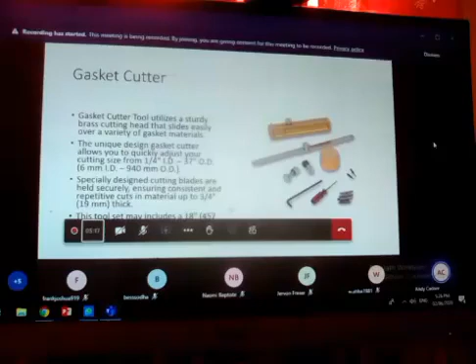Then we have the picks. These picks are used to take out the packing from the stuffing box. A little note on the pick here: they are made of special tool steel with the roughest usage. These tools are warranted not to break when removing the packing from any type of stuffing box. They tell you it's a warranty, that it shouldn't break, because they made it out of high-grade tool steel. So you wouldn't have that when you put it inside the packing. When you start to pull it out, hopefully the screw wouldn't break.

But you know, with all things, none break as yet when removing the packing.

You have your flexible packing extractor. This is our next type of extractor, but this one is slightly different. This one is stiff, non-flexible, and you have your flexible one. They say the flexible packing extractors are constructed with high-strength cable for the flexibility.

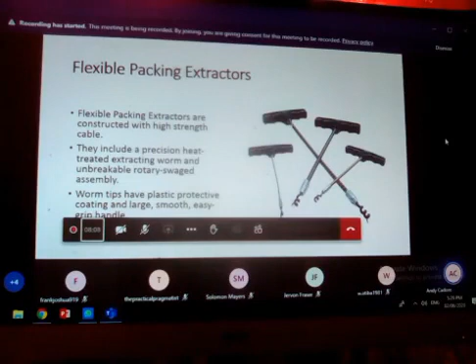Now, I'm not sure on the design of the flexible packing extractor that NESC has. This is just a certain brand which comes this way. Some of them don't have this easy to grip handle.

Hollow punch - they are used for punching holes in leather and gasket material. So hollow punch is a punch that is used for punching holes in leather and gasket material.

Now, most of the time you'll use the hollow punch if you're doing one of the full face gaskets and you have to actually punch out the bolt holes. So you could use this.

You could also use them when you're making small washers. But most of the time we make small washers in the case you're fabricating something close to a pump and you don't want, when you strike the arc, the bolts ground off onto the pump itself. So you tape up the bolts and you put these gasket material washers so that metal to metal contact between the pump and your flange face - to resist that metal to metal contact, you're going to use these gasket material washers.

We have a video presentation here on how you use the punch. It's a short video, so we can just take a look at it.

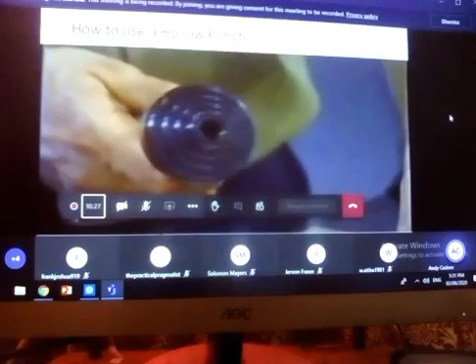All patch power punches are perfect for this job. To make this 5/8 bolt hole, you use a bayonet mount. Select the 5/8 cutter and put it on the mount. Line the tool up on your guide marks and strike it with a non-metallic mallet to cut the hole. ID and the OD at the same time - to do this, you mount both the ID cutter and the OD cutter on the bayonet at the same time. Notice how easily the cutters mount on the mandrel. Then you use the mallet to make the cut.

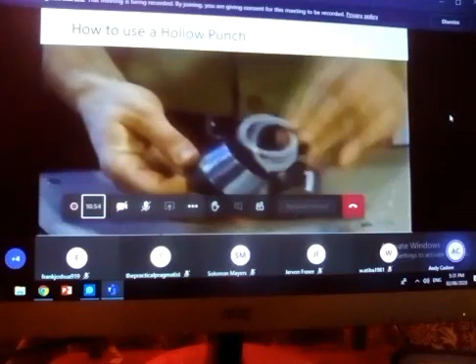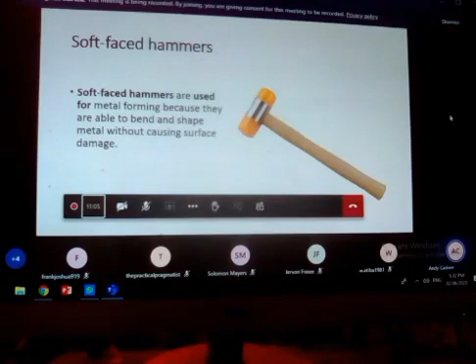Any questions? Any questions based on the hollow punch?

Now, if you look, this man in the video presentation has a nice hollow punch - it's a sort of double design. The hollow punches I know we have at NES are like these. So if you had a cutter inside and outside, you'll be using two separate punches. It isn't designed like the one on the video, where you use one punch and connect the two heads onto the mandrel.

Those that we have are like these, so you have to punch them individually. So if you want an inside diameter, you use a small one, and then you use a bigger one for the outside - that is in case you're making a washer. But normally you use the gasket cutter, and they give you the same small and large cut with the gasket cutter. Any questions so far?

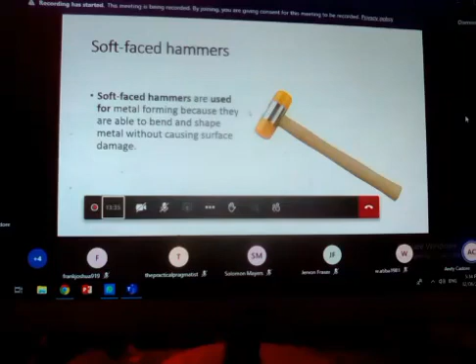Then you have your regular ball peen hammer. The ball peen hammer, also known as a machinist hammer, is a type of peen hammer used in metal work. It has two heads, one flat and the other called a peen, which is rounded.

Using the peen, and when we get into making gaskets, which will be on Thursday, you'll see how they actually use the head to mark out the gasket. You press the hammer head on the gasket face itself against the flange, and now you use the ball peen to cut the holes for the flange once you're tracing it.

So the ball has a purpose, the flathead has a purpose. The ball also has a purpose, which we know as peening, when you're using it to help shape metals.

For instance, most of the time you use the peen side of the hammer, or the ball side, like if you're making something like an orange peel. An orange peel is just a fitting you use to blank off a line. It's kind of outlawed in terms that it takes plenty gas, plenty heating and cutting.

If you're making a regular reducer, you could use it too, because sometimes you have to pound it to shape it, to get it curved. So what used to happen is you put it on a creating device, or use a pipe, and you're hitting it with the ball peen.

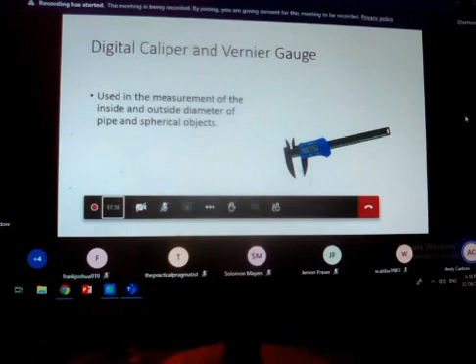Then we have the caliper, vernier caliper. So you have a digital caliper, vernier gauge, and this one is digital. It's used for measuring the inside and outside diameter of pipes and spherical objects. It's a more precise means of measuring than the measuring tape. You normally use calipers, it's a kind of machine shop tool. The machinists will use it because you want 100% accuracy if you're making a shaft.

We have a video on how you should learn to really use your caliper. Why? Because while you're testing the consistency with the valve stem, you might have some cases where you need to use a vernier caliper, not just the inside outside caliper. You might need an actual measurement, so you'll have to learn how to use the vernier caliper. This is just a small video on how to use it.

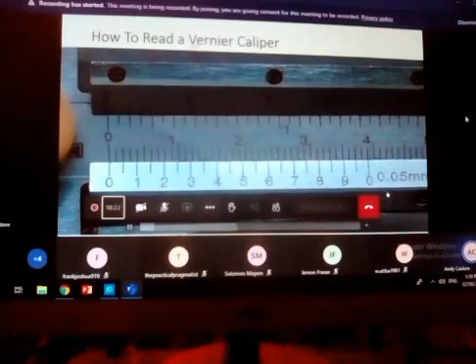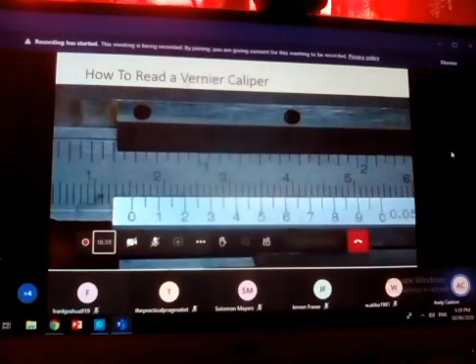This is the caliper, and the zero in the vernier scale is right on the zero in the main scale. The measurement I have is 0 millimeters. If I open the caliper, I can read 1 millimeter, 2 millimeters, 3 millimeters, 10 millimeters, 15 millimeters, 16 millimeters. But what if the zero in the vernier scale is between the 15 and the 16 millimeters in the main scale?

Well, then I must read the vernier scale. From here to here, the vernier scale represents 1 millimeter, and each line represents 0.05 millimeters. So here, the zero line in the vernier scale is after the 15 millimeters line in the main scale, so the measurement is 15 millimeters plus something more.

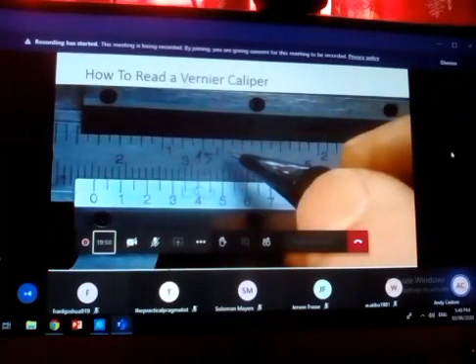Now I must look for 3 consecutive lines in the vernier scale that coincide with 3 lines in the main scale. Going from left to right, the lines in the vernier scale get closer and closer to coinciding with the lines in the main scale. These 3 lines seem to coincide quite well, and the next ones are to the left of the lines in the main scale. I am interested in the one in the middle. So the measurement is 15.40 millimeters. I have 8 lines, so 8 times 0.05 equals 0.40.

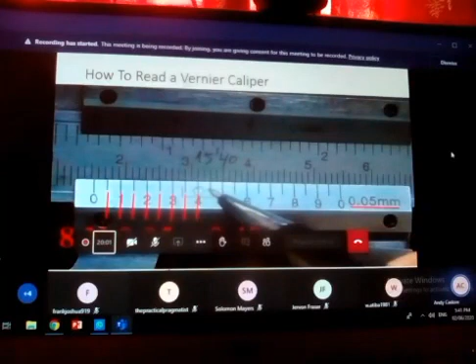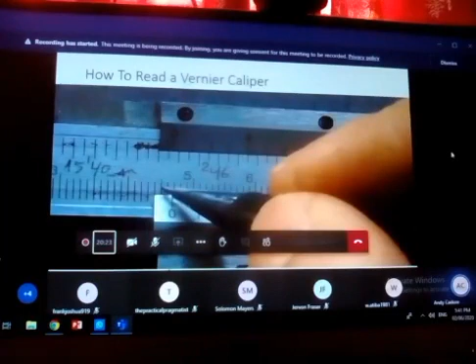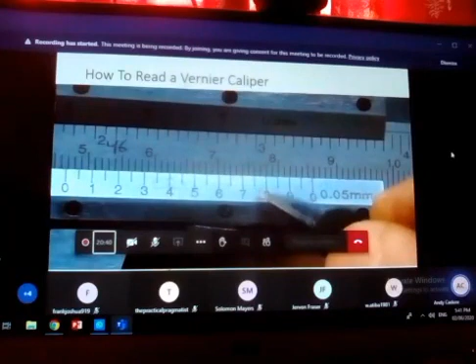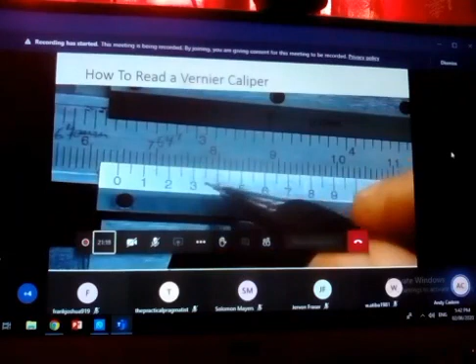Let's try it once again. Here I have 64 millimeters plus something more, and I have to look for the 3 lines. I will move the vernier scale, so this time I have something slightly different. These 3 lines coincide with 3 lines in the main scale. I am interested in the one in the middle. In this case, it is 0.35. So the measurement is 64.35 millimeters. I have 7 lines, so 7 times 0.05 equals 0.35 millimeters.

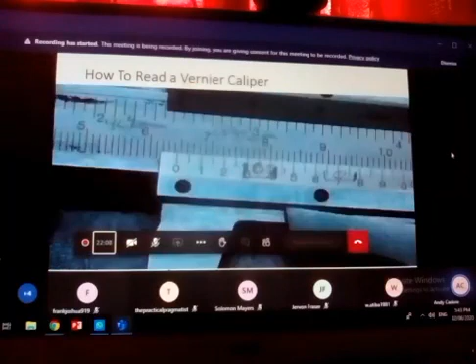Right, any questions based on the vernier caliper? This is just a demonstration on how to read a vernier caliper. As I said, it's a machinist tool, and if you're doing fabricating, you just go with the measurement close, and in that case it'd be better to say it's like 10 or 30 millimeters. You see the last one he did, he said 64 point something - so you're giving the point of whatever that millimeter is. It's a more accurate scale than the normal regular measuring tape or steel ruler.

And these are just examples because you might have to use the vernier caliper to check the measurement with, as I say, the valve stem, or if you're doing the hole diameter. You could use the vernier caliper for something more exact, something more precise than what your regular measuring tape or steel ruler will get you.

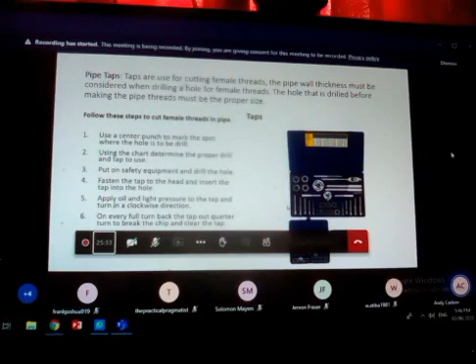Alright, pipe tap. Now even though we have a tap here, the main thing - this reading is on tapping, but the main thing is really the die. This here you're seeing, which by the cursor is - these are the dies, and these straight ones here are the tap.

The difference between the tap and the die: a die is used to cut male thread, a tap is used to cut female thread. So if you want to cut something inside, you use the tap. If you want to cut threads to the outside, which is going to be male thread, you use the die.

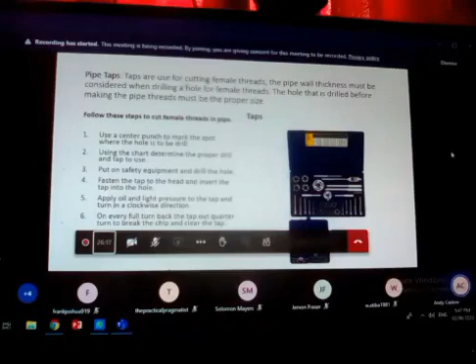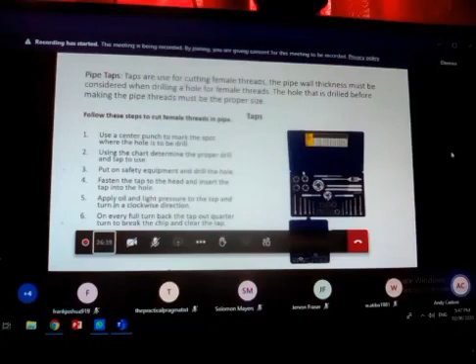And if you remember the video, when you're doing the valve servicing, sometimes the bolts that hold the gland and the gland follower, the gland flange - sometimes when you remove them, they have gumming, some of them might be rust. So what you do is put the die over it and do a process called chase - they come like you're tracing it over, but they say you chase it.

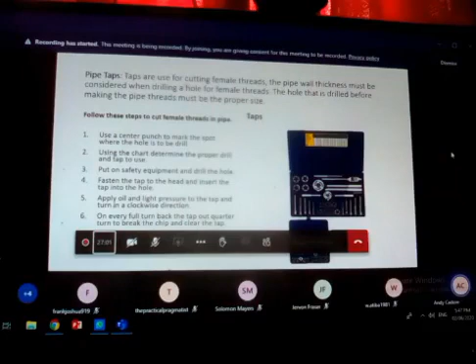This reading here is telling you about the tap. It didn't tell you as much about the die, but the die is just placed to the outside of the stud, and you run the die over the stud to make back the male threads. The tap, as I say, makes female thread - taps are used for cutting female thread.

The pipe wall thickness must be considered when drilling a hole for female thread. The hole that is drilled before making the pipe thread must be the proper size. So when you're tapping something and you drill the hole, say you drill a half-inch hole, there's a certain size tap to use to cut thread in that half-inch hole.

And if you look here within the box, this is a chart that I'll give you. The chart will tell you what tap to use depending on what size hole you drill. It's nothing that I can say I know offhand - there's a chart, so if you know you want to use half-inch, it will tell you what size hole to drill and what size tap to use for the half-inch.

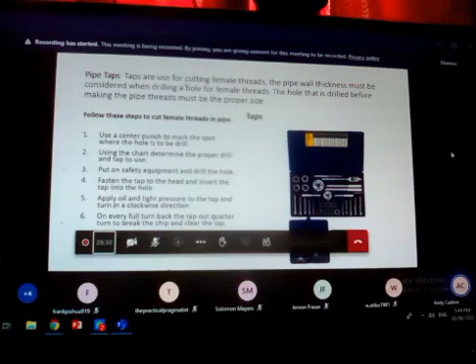So they give you some steps on how to tap a hole. First, you use a center punch and mark the spot where the hole is to be drilled - you don't want it to wander off when you're drilling, so you center punch it. Using the chart, determine the proper drill and tap to use - so they refer you to the chart so you know the proper drill bit size and the proper tap size to use.

Put on safety equipment and drill the hole - so you put on your PPE when you're drilling the hole. Fasten the tap to the head and insert the tap into the hole. You might not see it well here, but this handle holds the tap. You just put the tap into the handle and tighten it - there's a small screw to the side, you tighten it and that will hold the tap. Then you insert it into the hole that you drilled.

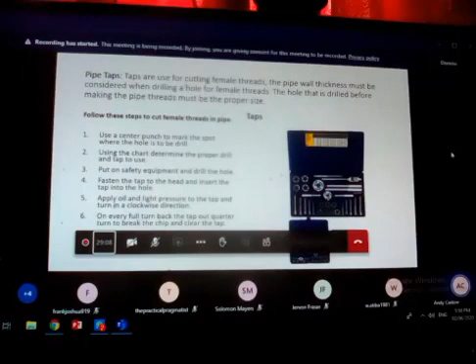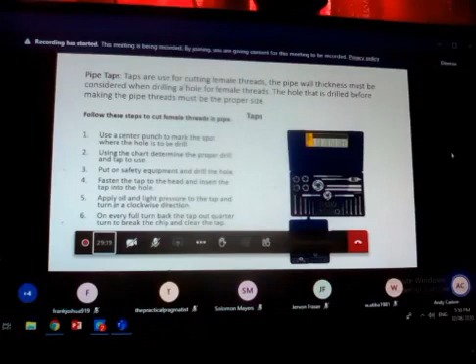So the next step here: apply oil and light pressure to the tap and turn in a clockwise direction. Light pressure, because the tap is easy to break. Don't let the fabricators rush using the tap, because some fabricators are a little strong. In the lab, we broke about 3 taps within 10 minutes. They just drill the hole and forget about the tap in the hole. So you apply light pressure.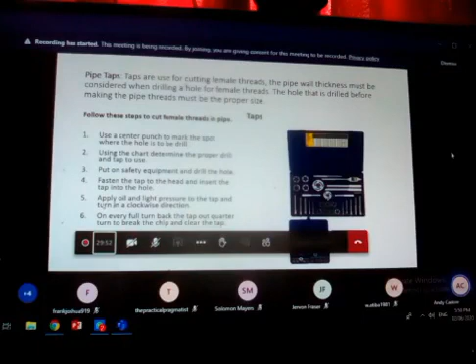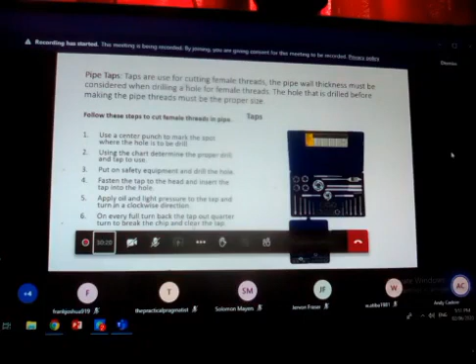On every full turn, you're turning in a clockwise direction. But step number 6 says now, on every full turn, back the tap off a little. Break the chips and clean the tap. You don't want to be tapping right through, turning it clockwise the whole time. So every time you make a full turn, you go back a quarter turn backward, because the threads, the shaving, now make some chips, some brittle chips.

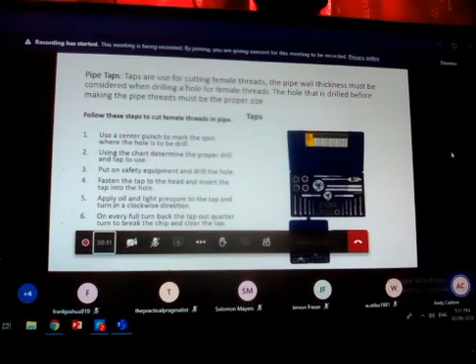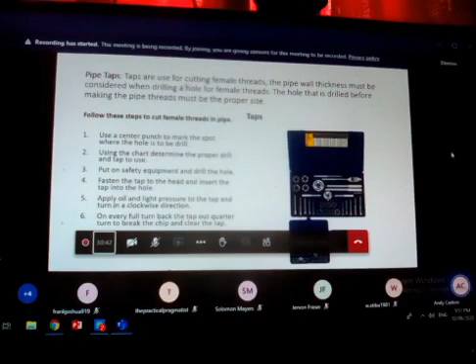If you continue threading it right through, what happens? It damages the teeth on the tap. So every time you go one turn forward, you move a quarter backward to break the chips. You make the next turn forward, you make a quarter backward, you break the chips. Repeat these steps until the required number of threads are cut. And that is how you use a tap.

Wrench. So we're looking at wrenches now. Wrenches are used to hold and turn screws, nuts, and bolts that have octagonal heads. Some wrenches are designed to hold and turn threaded pipe - that is the pipe wrench.

So wrenches now are available in adjustable and non-adjustable types. So they are adjustable and non-adjustable wrench. Non-adjustable wrench fits only one size nut and bolt.

There are 4 common types of non-adjustable wrenches, and we'll get into them just now. They are available in English and metric sizes. So you could get a 1/2 inch, a 3/4 inch, 1 inch, as well as a number 8, number 10, number 14, 16 in metric size.

This adjustable wrench can adjust to fit different size nuts and bolts. So if you want to use a wrench on different size nuts and bolts, it's better you have an adjustable wrench.

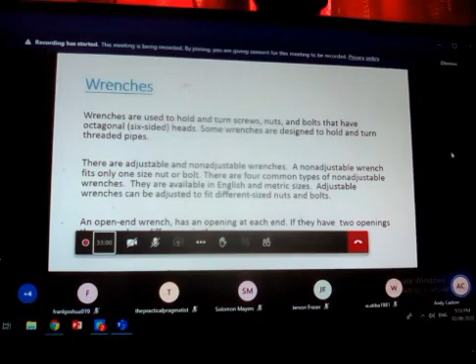This is your open end wrench here. These are your non-adjustable wrenches. Open end, and we also call this closed end or box end wrenches. Hex head, we call it Allen key, or a hex key. And then you have the combination. A combination will have an open end and a closed end.

So we look at the box end. Box end wrench has 6 or 12 points. They are easy to use because they provide a firm grip and will not slip off the nut or bolt. Not like the open end, depending on how you push it, it will reach a point where it could slide off. With the box end now, everything is boxed in, or closed in, so there's no chance that when you turn this wrench, it will slip off.

You have your Allen wrench, what we call the Allen key. Key wrench, made to fit the sockets of hex head screws or bolts. They are often used in tightening set screws. So if you have a set screw, you could use this Allen key, hex key, Allen wrench - whatever you want to call it.

Then you have your combination wrench. The combination wrench will have an open end on one end and a box end on the other.

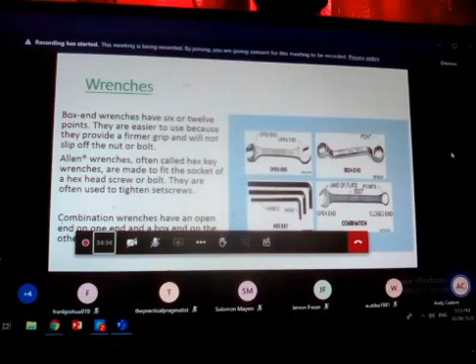So you have an open end on one side and a closed end on the other. Then we have adjustable wrenches, the pipe wrench, and this one I call a spud wrench.

And this here is an adjustable end wrench, what we call a crescent, right? But crescent is really a brand. You could have a Stanley, you could have Klein. These are popular wrenches, right? You could have Toolcraft, and it could have Crescent.

Crescent is a brand, but everybody just knows these wrenches as Crescent wrenches because it was the first brand that came over. They give you a Stanley, you're satisfied with that. But if you look at the wrench, some of them are Crescent, but that's just the brand name.

So an adjustable wrench has one fixed jaw and one movable jaw. The opening is adjusted by turning the adjusting nut. The use of the wrench can save time when working with different size nuts and bolts. Pipe wrench, also called a monkey wrench, is used to hold and turn threaded pipe.

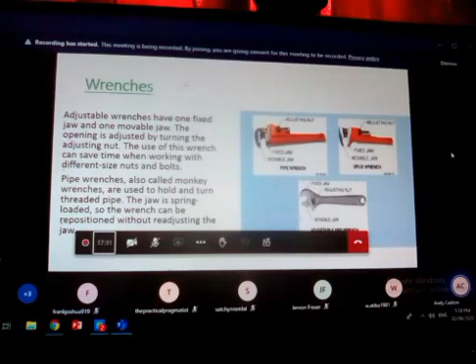So you could work quick. You pull, you squeeze, you open it, you reset it, you latch it back onto the pipe, you pull. So you don't have to adjust this nut with every stroke or every pull. It's spring loaded.

Bench vise, and I believe this is the last tool we'll be looking at today. We know what a bench vise is, what it looks like, and its purpose. It's just to give aid while working on an object or equipment, a holding aid, a mechanical holding device. So the bench vise is a stationary vise with two sets of jaws, one for holding flat work and the other for round pipe.

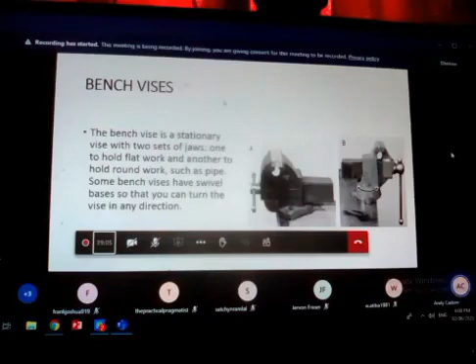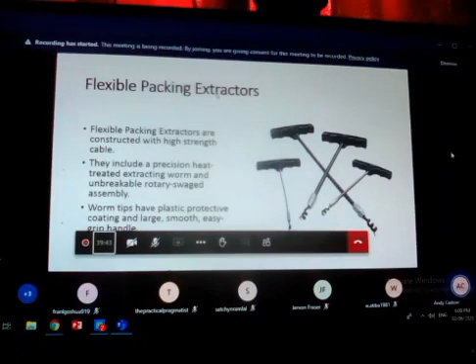Now, these are some of the common tools that you'll come across when doing valve servicing. The practical instructor found it worthy that you understand what you're working with and some of the tools you'll come across and how to use them. We didn't get into the uses of some of the common tools, but for the uncommon ones, we had a video demonstration on how to use them. And mind you, we also have a demonstration on how to use the gasket cutter.

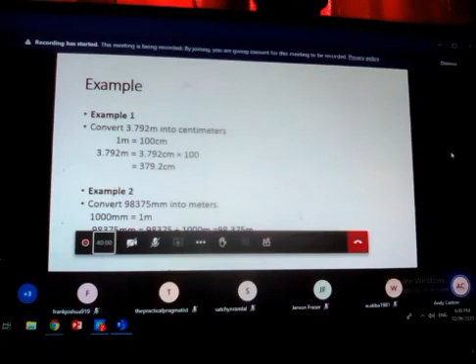When we read the practical aspect, going through the slides fast, you should get the slides later. You'll reach the laying out of the gasket, and I'll show you how to lay it out. Within the demonstration, you'll see how to use the gasket cutter, and they show different methods on how to lay out the gasket.

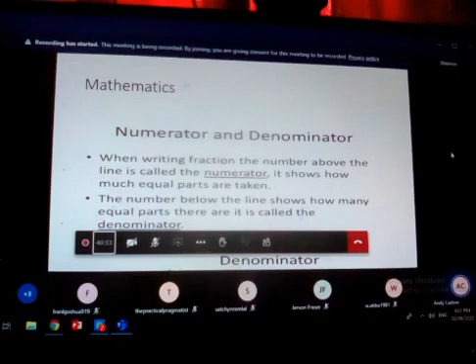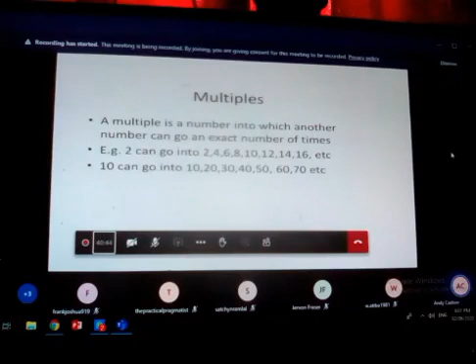Tomorrow, please the Lord, we'll be doing a quick review on maths. We're not going into every detail in terms of maths, but just how to read the measuring tape, be it feet and inches or the metric system. So we'll just give a brief review on the calculation aspect of it.

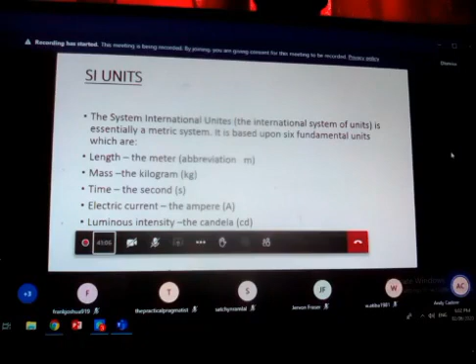Last we have to do is the circle. Why the circle? The circle has to deal with the gasket, or the laying out of the bolt holes. I'll show you how to divide a circle - we'll divide that circle into 4, then how to divide it into 8.

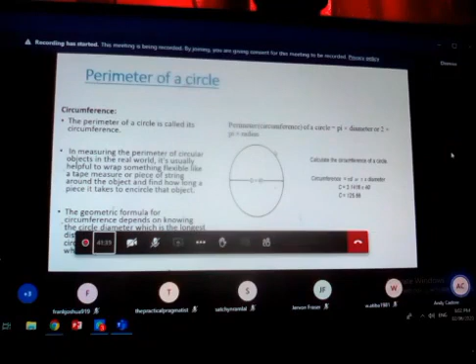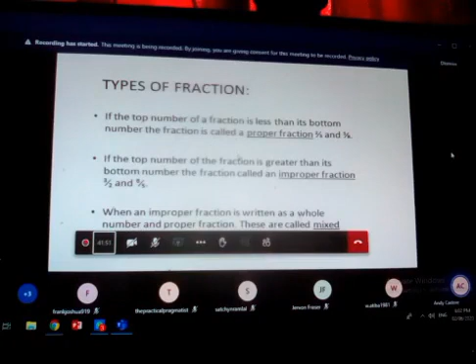And how you divide it into 12, because the bolt holes are added in quadrants of 4. So we'll just look at how you divide the circle. But you have to learn the circumference, because when you lay out the circle you have to know how to divide it, so afterwards you can lay out the bolt holes, depending on which type of gasket you're making.

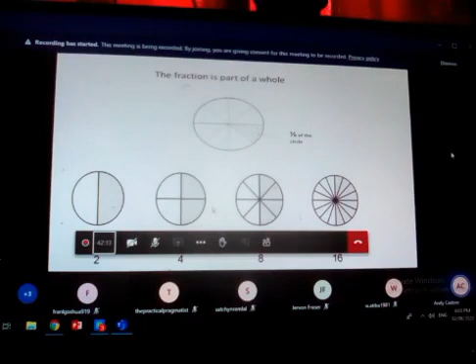Any questions based on today's lesson? Anybody? No, no questions from me. So everything was clear, right? Straightforward, Mr. Kadeem. What was the topic for today?

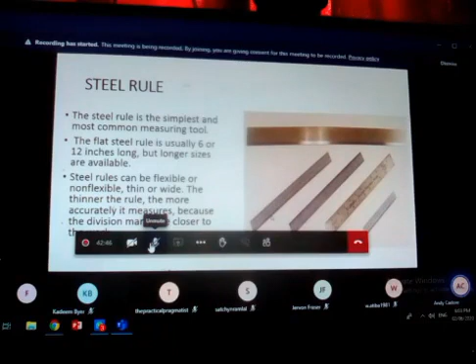As I said, tomorrow I believe everybody knows how to measure, but as the practical instructor said, just give them a briefing on it again in case it slipped their mind. So just want to make sure they can do the basic measurements and stuff like that. We'll look at some of that tomorrow, please God.

Any questions before I go? When you get the slides, go over them - there's a lot of video. So as long as you open one link from what I send you, you might see about 5 videos showing you the same thing. Everybody has different ways of doing things, but you'll get the idea more or less.

The more ideas you get, the easier it will become when you reach the shop, because you have a different perspective on how you do it, how you use this. Some might be right, some might be wrong, but at the same time you have a basic understanding of how to use the tool.